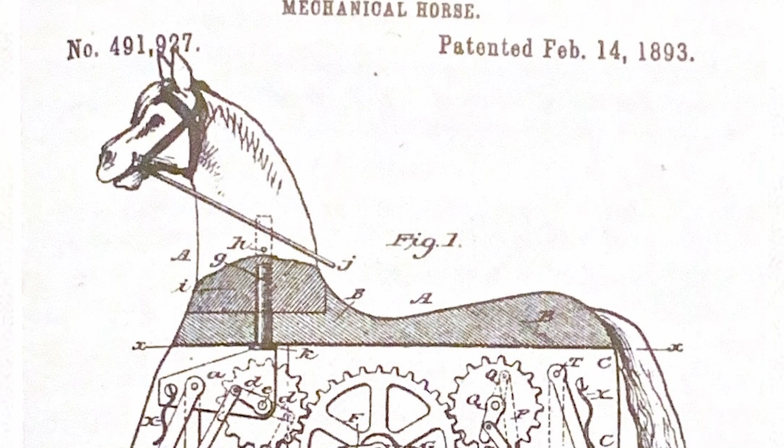The study of walking machines also had its origin in Muybridge's time. An early walking model appeared in about 1870. It used kinematic linkage to move the body along a straight horizontal path, while the feet moved up and down to exchange support during stepping. The linkage was originally designed by the famous Russian mathematician Chebyshev some years earlier.

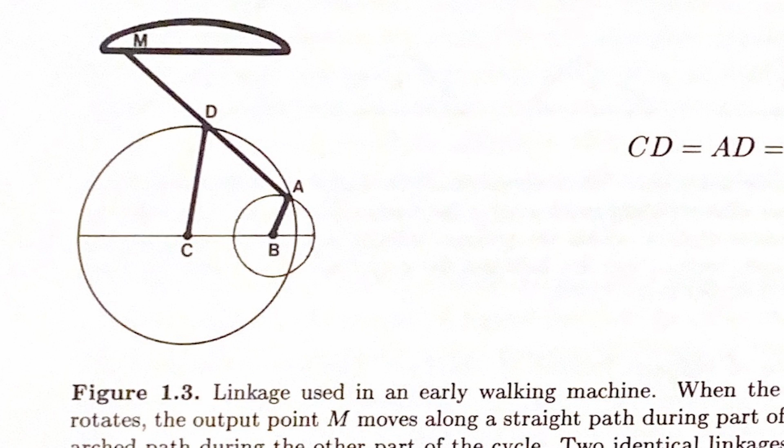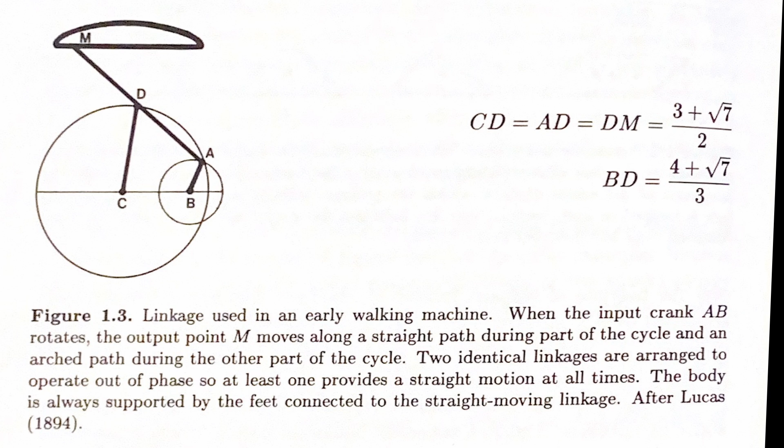During the 80 or 90 years that followed, workers viewed the task of building walking machines as the task of designing kinematic linkages that would generate suitable stepping motions when driven by a source of power. Many designs were proposed, but the performance of such machines was limited by their fixed pattern of motion, which could not adjust to variation in the terrain. By the late 1950s, it had become clear that a linkage providing fixed motion would not do the trick, and that useful walking machines would need control.

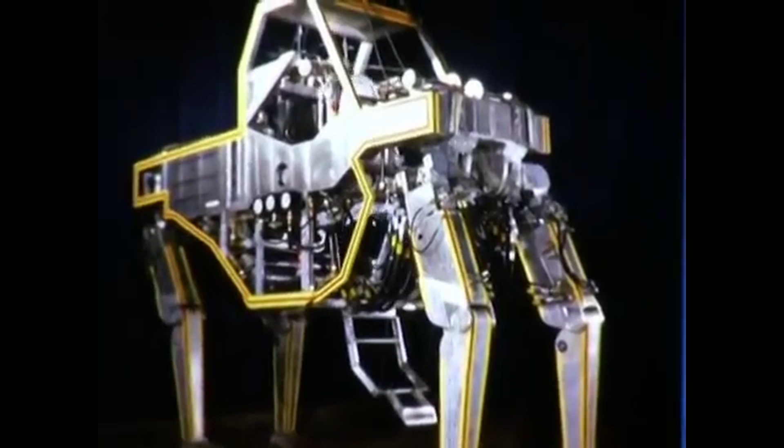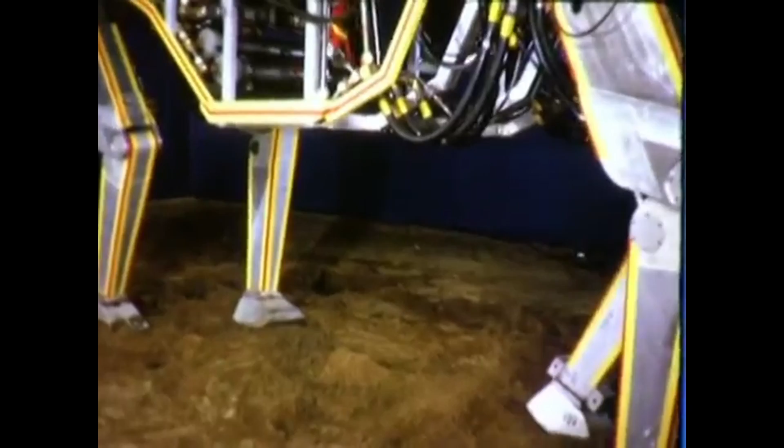One approach to control was to harness a human. Ralph Mosher used this approach in building a 4-legged walking truck at General Electric in the 1960s. The project was part of a decade-long campaign to build better teleoperators capable of providing better dexterity through high-fidelity force feedback. The machine Mosher built stood 11 feet tall, weighed 3,000 pounds, and was powered hydraulically. It is shown in Figure 1.5.

Each of the driver's limbs was connected to a handle or pedal that controlled one of the truck's 4 feet. Whenever the driver caused a truck leg to push on an obstacle, force feedback let the driver feel the obstacle as though it was his or her own arm or leg doing the pushing.

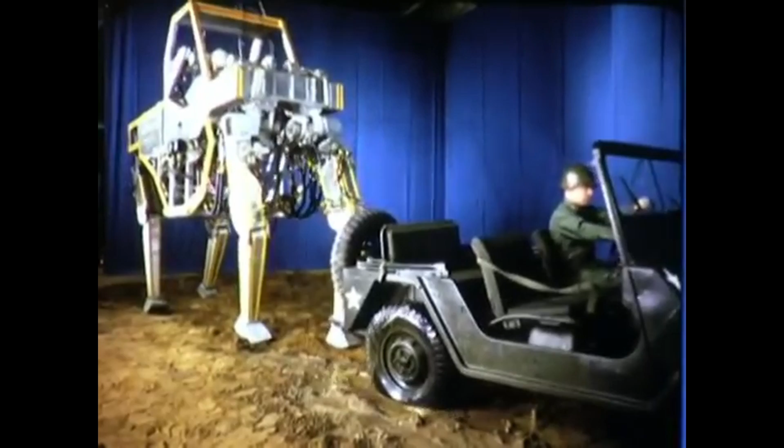After about 20 hours of training, Mosher was able to handle the machine with surprising agility. Films of the machine operating under his control show it ambling along at about 5 miles per hour, climbing a stack of railroad ties, pushing a foundered jeep out of the mud, and maneuvering a large drum onto some hooks. Despite its dependence on a well-trained human for control, this walking machine was a landmark in legged technology and continues to be a significant advance over many of its successors.

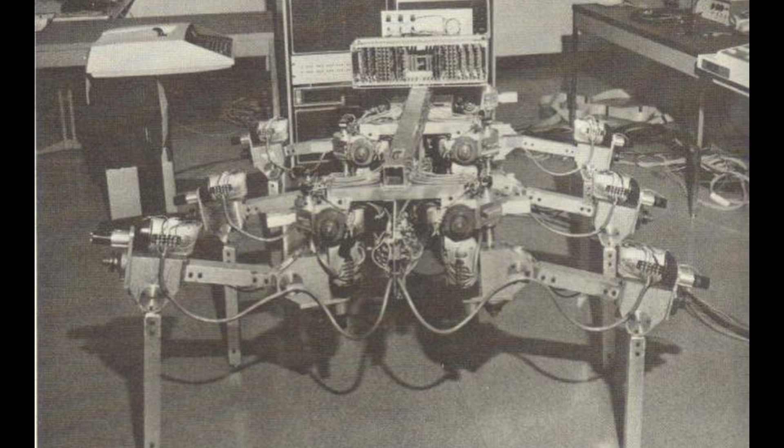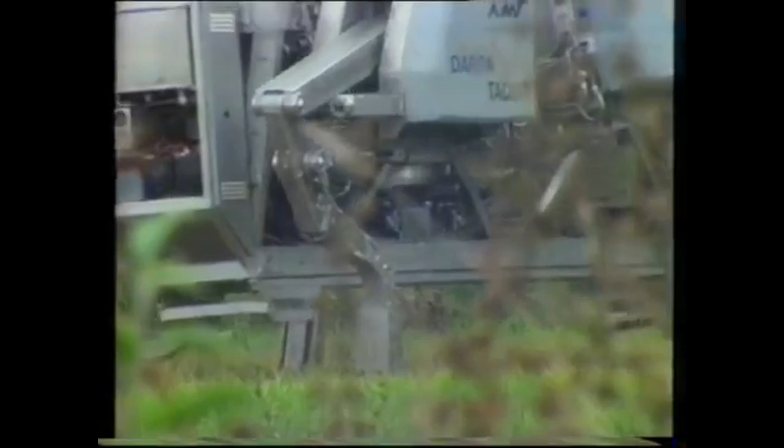An alternative to human control of legged machines became feasible in the 1970s: the use of a digital computer. Robert McGhee's group at Ohio State University was the first to use this approach successfully in 1977. They built an insect-like hexapod that could walk with a number of standard gaits, turn, crab, and negotiate simple obstacles. The computer's primary task was to solve kinematic equations in order to coordinate the 18 electric motors driving the legs.

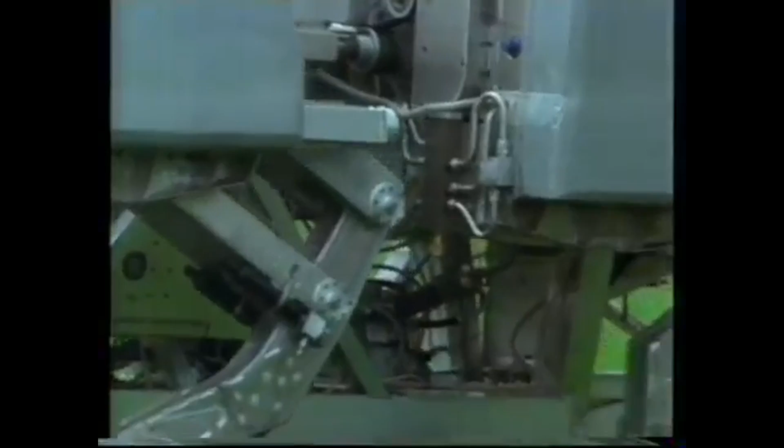This coordination ensured that the machine's center of mass stayed over the polygon of support provided by the feet, while allowing the legs to cycle through a gait. The machine traveled quite slowly, covering several meters per minute. Force and visual sensing provided a measure of terrain accommodation in later developments.

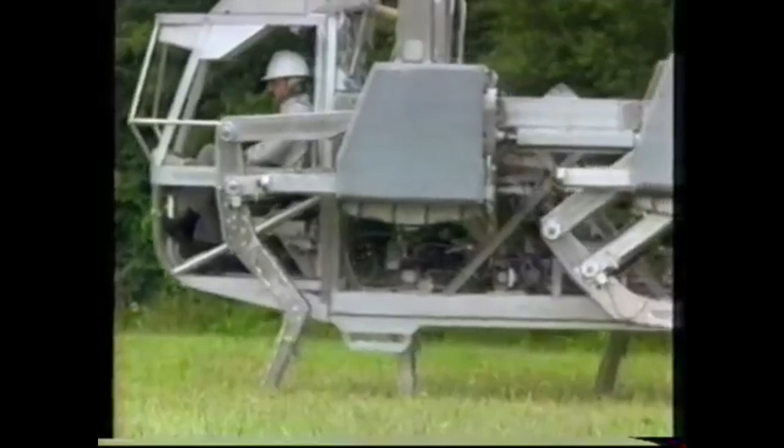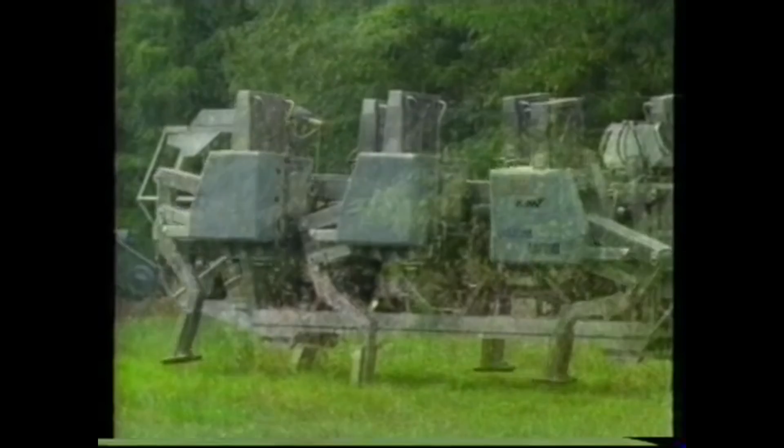The hexapod provided McGhee with an excellent opportunity to pursue his earlier theoretical findings on the combinatorics and selection of gait. The group at Ohio State is currently building a much larger hexapod, about 3 tons, that is intended to operate on rough terrain with a high degree of autonomy.

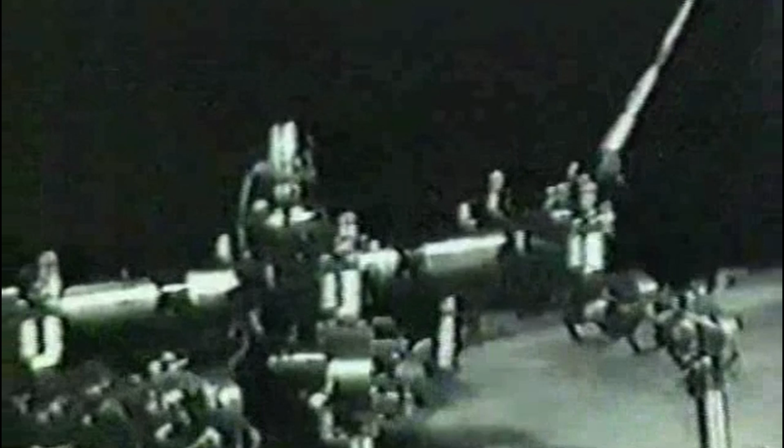Gurfinkel and his co-workers in the USSR built a machine with characteristics and performance quite similar to McGhee's at about the same time. It used a hybrid computer for control, with heavy use of analog computation for low-level functions.

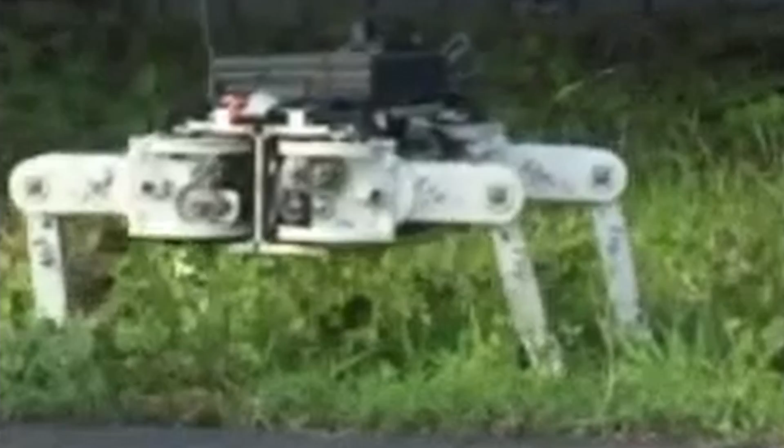Hirose realized that linkage design and computer control were not mutually exclusive. His experience designing clever and unusual mechanisms, having built seven kinds of mechanical snake, led to a special leg that simplified the control of locomotion and could provide efficiency. The leg was a 3-dimensional pantograph.

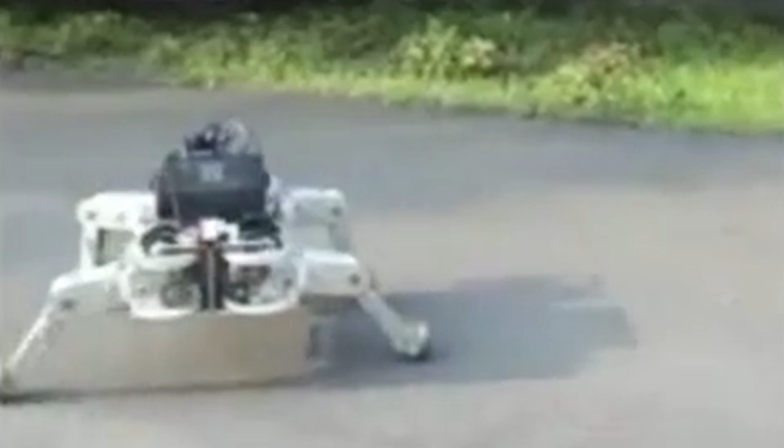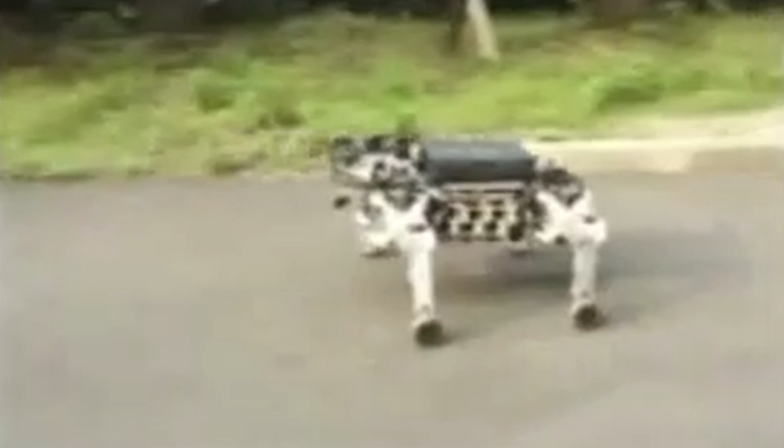With the ability to generate X, Y, and Z translations of each foot by merely choosing an actuator, the control computer was freed from the arduous task of performing kinematic solutions. Actually, the mechanism linkage was helping to perform the calculations needed for locomotion. The linkage was efficient because the actuators performed only positive work in moving the body forward.

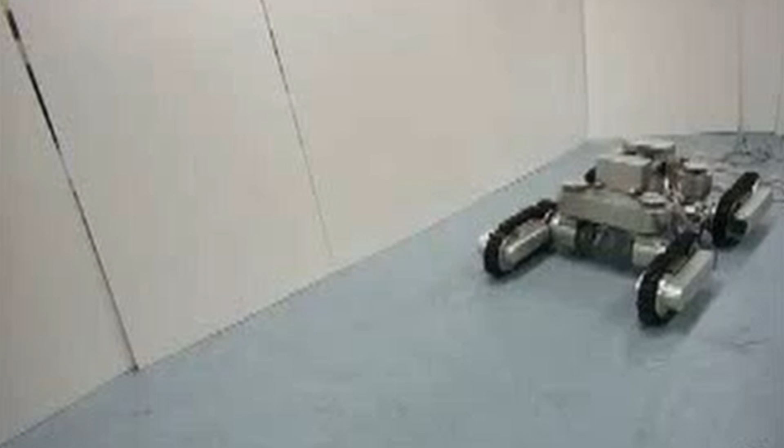Hirose used this leg design to build a small quadruped about one meter long. It was equipped with a touch sensor on each foot and an oil-damped pendulum attached to the body. Simple algorithms used the sensors to control actions of the feet. For instance, if a touch sensor indicated contact while the foot was moving forward, the leg would move backwards a little bit, move upward a little bit, then resume its forward motion. If the foot had not cleared the obstacle, the cycle would repeat.

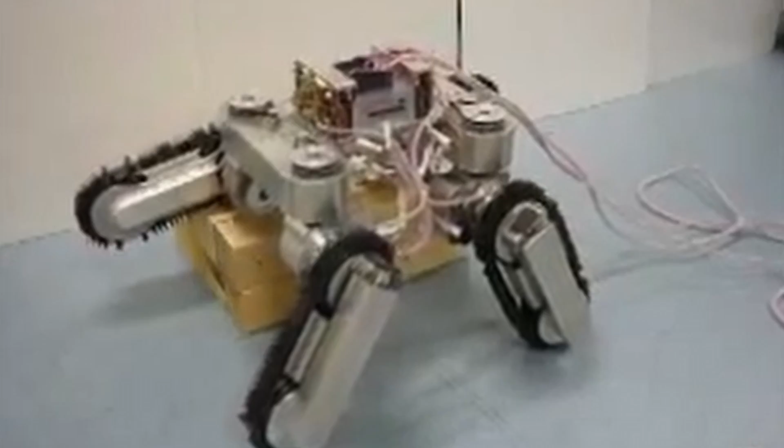The use of several simple algorithms like this one permitted Hirose's machine to climb up and down stairs and to negotiate other obstacles without human intervention.

These three walking machines, McGhee's, Gurfinkel's, and Hirose's, represent a class called static crawlers. Each differs in the details of construction and in computing technology used for control, but they share a common approach to balance and stability. Enough feet are kept on the ground to guarantee a base of support at all times, and the body and legs move to keep the center of mass over this broad support base.

The forward velocity is low enough to predict stability based on the spatial configuration of the body and feet, without worrying about stored energy. Each of these machines has been used to study rough terrain locomotion in the laboratory, including experiments on terrain sensing, gait selection, and selection of foothold sequences. Several other machines that fall into this class have been studied in the intervening years.

Research on active balance.

This last section focuses on legged machines that use static techniques for balance. We now turn to the study of dynamic machines that balance actively. The first machines that balanced actively were automatically controlled inverted pendulums. Everyone knows that a human can balance a broom on their finger with relative ease. Why not use automatic control to build a broom that can balance itself?

Claude Shannon was probably the first to do so. In 1951, he used parts from an erector set to build a machine that balanced an inverted pendulum atop a small powered truck. The truck drove back and forth in response to the tipping movements of the pendulum, as sensed by a pair of switches at its base.

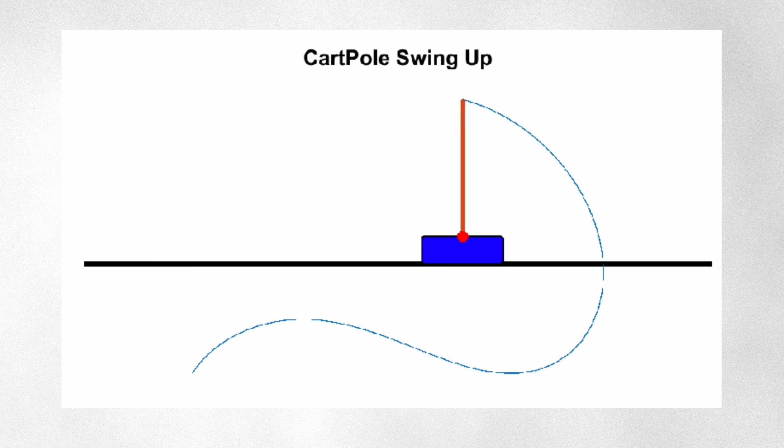In order to move from one place to another, the truck first had to drive away from the goal to unbalance the pendulum toward the goal. In order to balance again at the destination, the truck moved past the destination until the pendulum was again upright with no forward velocity. It then moved back to the goal.

It was at Shannon's urging that Cannon and two of his students at Stanford University set about demonstrating controllers that balanced two pendulums at once. In one case, the pendulums were mounted side by side on the cart, and in another case, they were mounted one on top of each other.

Cannon's group was interested in the single input, multiple output problem and the limitations of achievable balance. How could they use the single force that drove the cart's motion to control the angle of two pendulums, as well as the position of the cart? How far from balance could the system deviate before it was impossible to return to equilibrium?

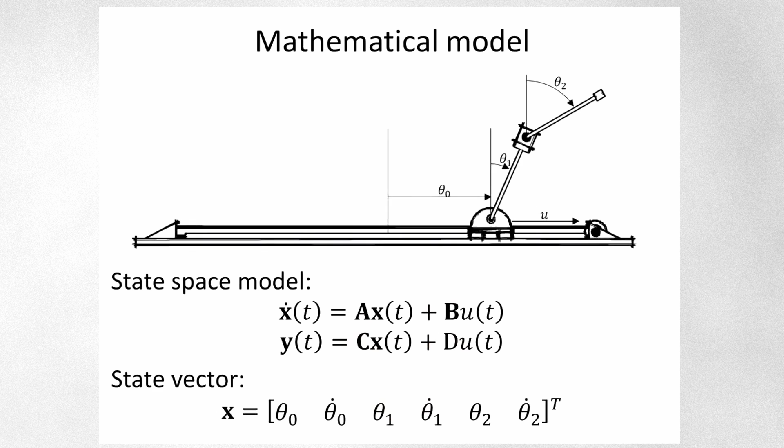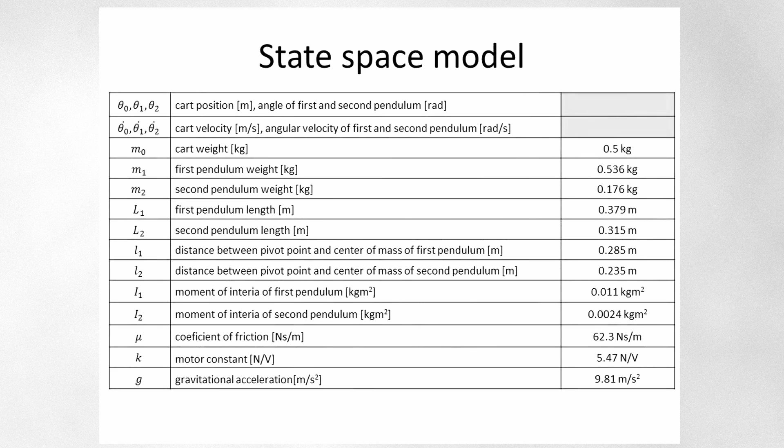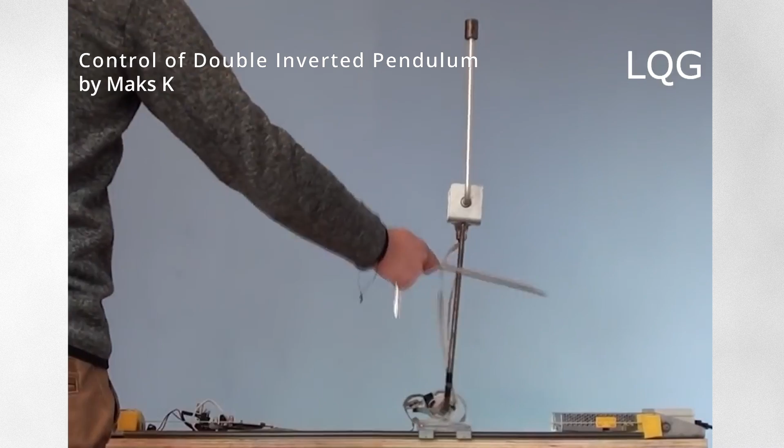Later, they extended these techniques to provide balance for a flexible, inverted pendulum. These studies of balance for inverted pendulums were important precursors to later work on locomotion. The inverted pendulum model for walking would become the primary tool for studying balance in legged systems. It is unfortunate that no one has yet extended Cannon's elegant analytical results to the more complicated legged case.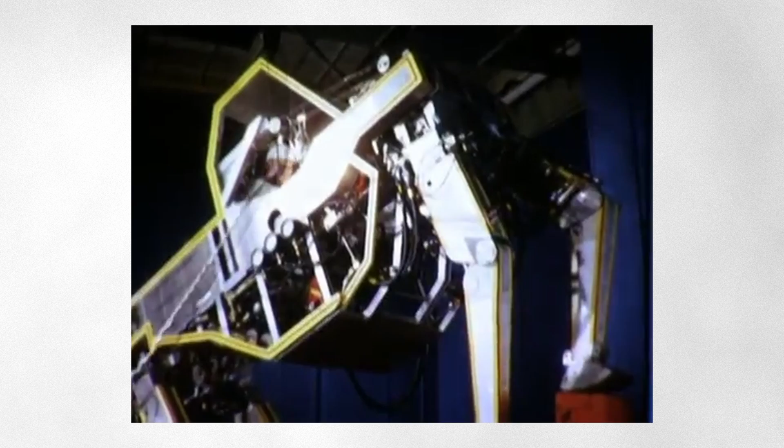Mosher's group at General Electric was also interested in balance. Their original intention, before deciding to build the quadruped described earlier, was to build a walking biped that would be controlled by a human who would walk in an instrumented harness inside the cockpit.

They started with a human factors experiment because they were unsure of the human's ability to adjust to the exaggerated vestibular input that would be experienced when one drives a machine several times taller than oneself.

In the experiments, subjects stood on an inverted pendulum about 20 feet tall. The pendulum had pivots like an ankle and a hip, one at the floor and one below the platform that supported the subject. These pivots were servoed to allow the corresponding ankle and hip motions of the subject.

All 86 people tested learned to balance the machine in less than 15 minutes, and most learned in just 2 or 3. Although the GE walking truck mentioned earlier could, in principle, operate using purely static techniques, the driver's ability to balance it actively probably contributed to its smooth operation. A GE walking biped was never built.

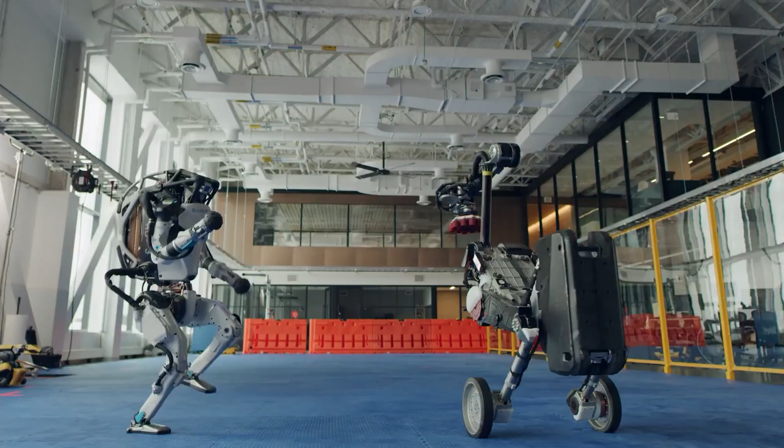The importance of active balance in legged locomotion has been widely recognized for some years, but progress in building physical legged systems that employ such principles was retarded by the perceived difficulty of the task. It was not until the late 1970s that experimental work on balance in legged systems got underway.

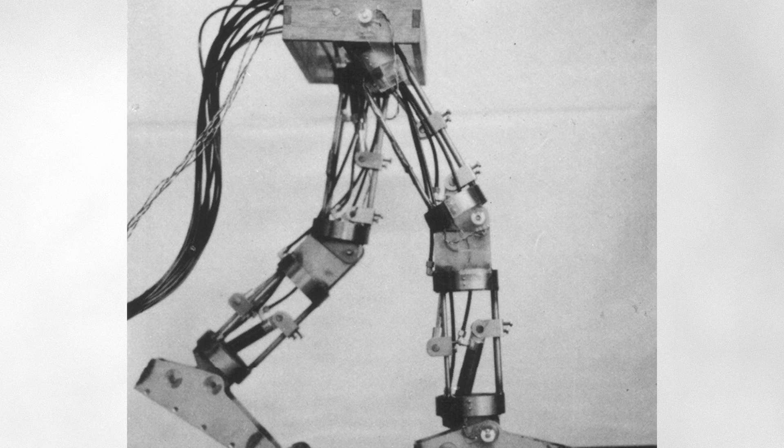Kato and his co-workers built a biped that walked with a quasi-dynamic gait. The machine had 10 hydraulically powered degrees of freedom and 2 large feet. Generally, this machine was a static crawler, moving along a pre-planned trajectory to keep the center of mass over the base of support provided by the supporting foot.

Once during each step, however, the machine temporarily destabilized itself to tip forward, so that support would be transferred quickly from one foot to the other. Before the transfer took place on each step, the catching foot was positioned so that it would return the machine to equilibrium passively, without requiring an active response.

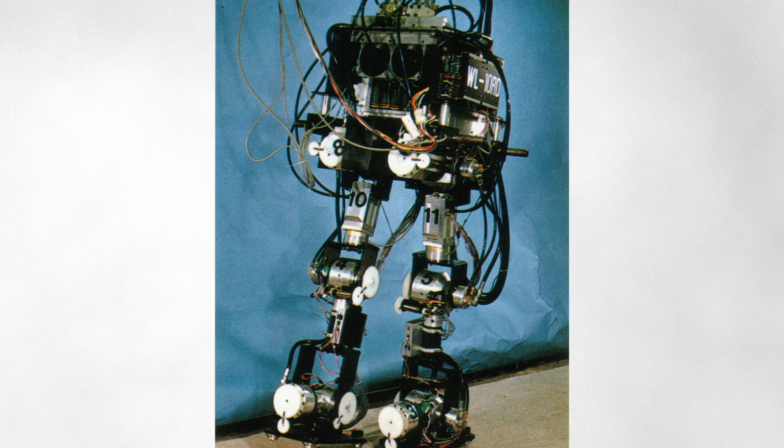A modified inverted pendulum model was used to plan the tipping motion. In 1984, the machine walked with a quasi-dynamic gait, taking about a dozen half-meter-long steps per minute. The use of a dynamic transfer phase makes an important point: a legged system can employ complicated dynamic behavior without requiring a very complicated control system.

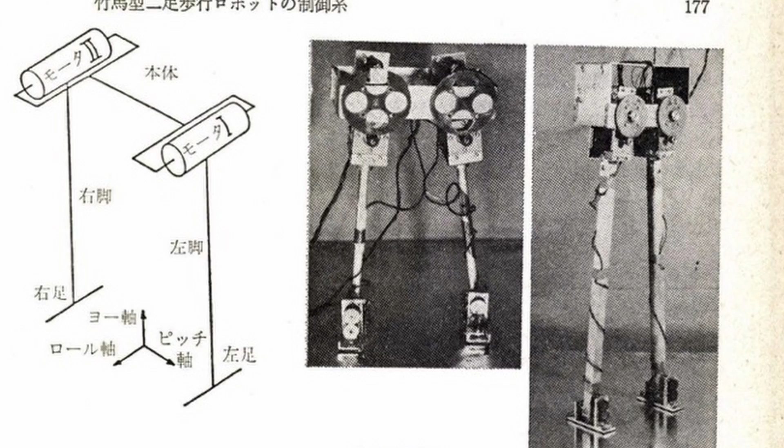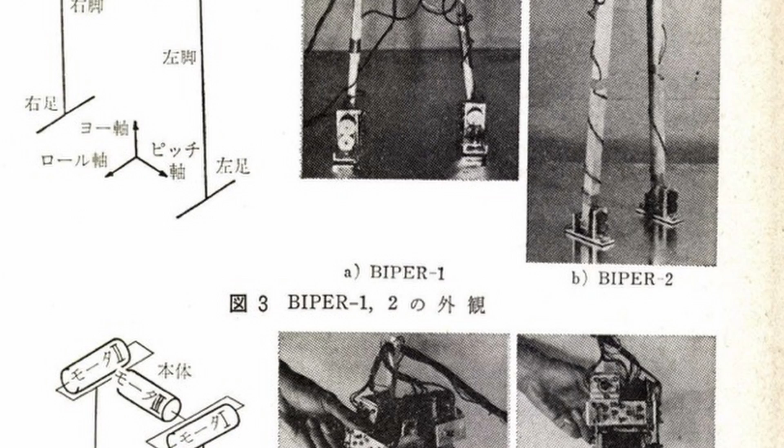Miura and Shimoyama built the first walking machine that really balanced actively. Their stilt biped was patterned after a human walking on stilts. Each foot provided only a point of support, and the machine had 3 actuators, one for each leg that moved the legs sideways, and a third separated the legs fore and aft.

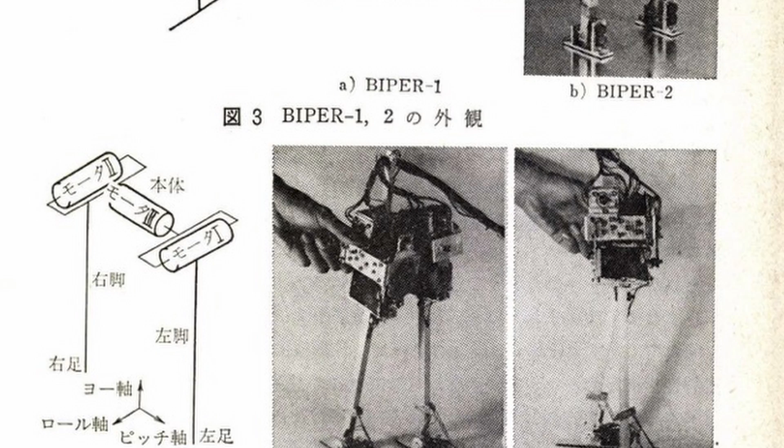Because the legs did not change length, the hips were used to pick up the feet. This gave the machine a pronounced shuffling gait, like a Charlie Chaplin stiff-kneed walk.

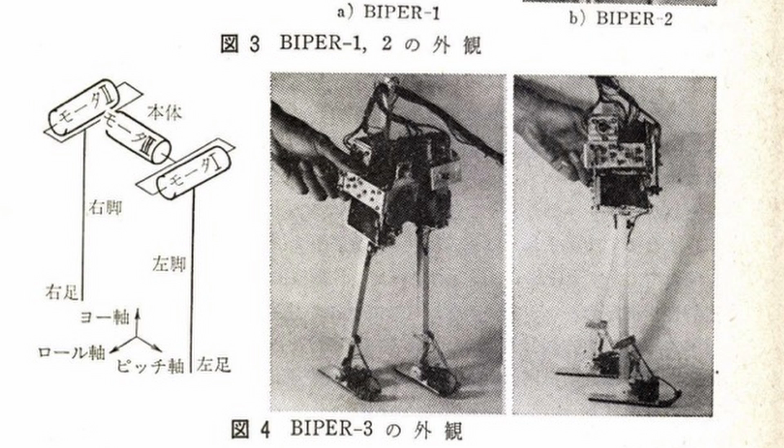Once again, control for the stilt biped relied on an inverted pendulum model of its behavior. Each time a foot was placed on the floor, its position was chosen according to the tipping behavior that was expected from an inverted pendulum.

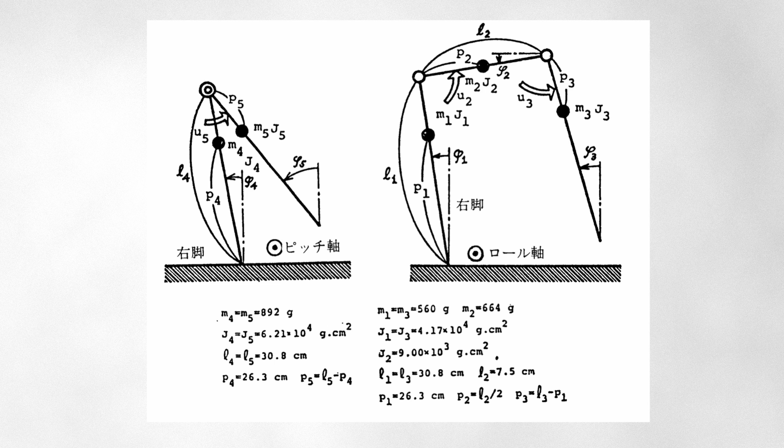Actually, the problem was broken down as though there were 2 pendulums, one in the pitching plane and one in the rolling plane. The choice of foot position along each axis took the current and desired state of the system into account. In order to perform the necessary calculations, the control systems used tabulated descriptions of planned leg motions together with linear feedback.

Unlike Kato's machine, which came to static equilibrium before and after each dynamic transfer, the stilt biped tipped all the time. Matsuoka was the first to build a machine that ran, where running is defined by periods of ballistic flight with all feet leaving the ground. His goal was to model repetitive hopping in the human.

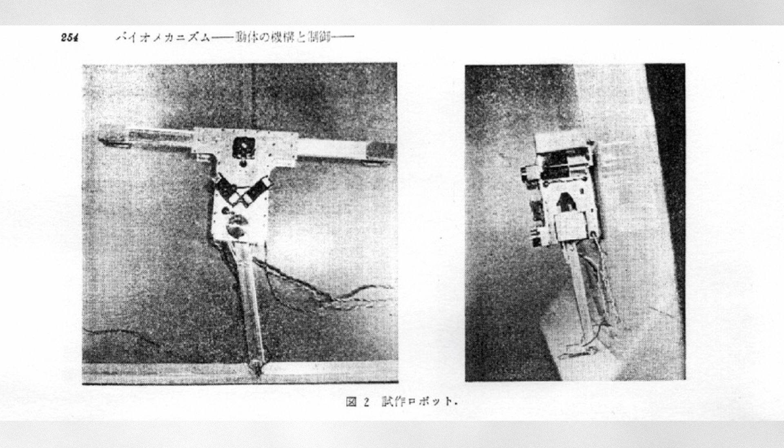He formulated a model consisting of a body and one massless leg, simplifying the problem by assuming that the duration of the support phase was short compared with the ballistic flight phase. This extreme form of running, for which nearly the entire cycle was spent in flight, minimized the influence of tipping during support.

This model permitted Matsuoka to derive a time-optimal state feedback controller that provided stability for hopping in place and for low-speed translations. To test his method for control, Matsuoka built a planar one-legged hopping machine.

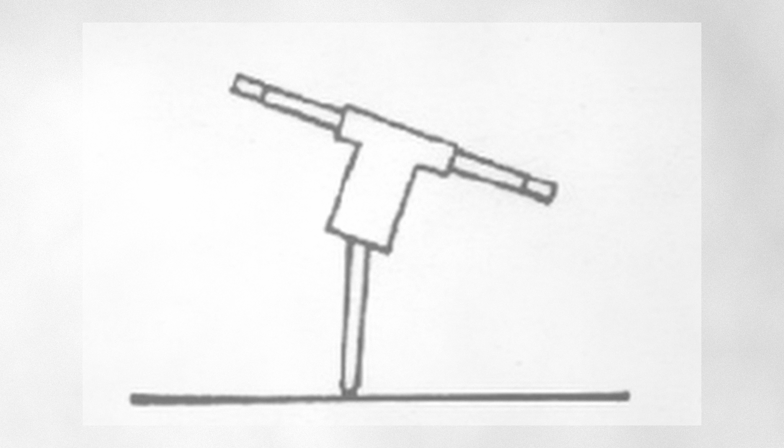The machine operated at low gravity by lying on a table inclined 10 degrees from the horizontal, rolling on ball bearings. An electric solenoid provided a rapid thrust at the foot, so the support period was short. The machine hopped in place at about 1 hop per second and traveled back and forth on the table.